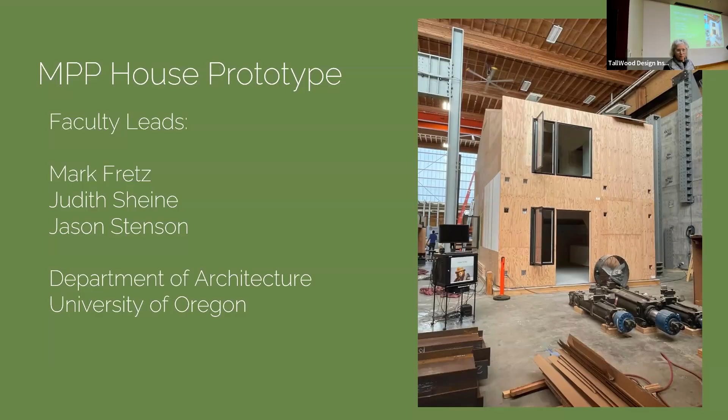So this is a project that we have been working on for way too long, really starting in 2018 and then really starting on it in 2020. We were actually working with very small grants from the sub-awards from Wood Innovation Grants for a while. And when the EDA BBRC project came along, that project provided funding to actually do full-size prototyping, which is when we actually began to make progress on the project.

So there's more history and background to this, which I won't go through, but basically we developed a 2-story, 2-bedroom, very compact house type, which is meant for cottage clusters and ADUs in response to Oregon legislation, which essentially got rid of single-family zoning in any community over population 10,000, and we're trying to develop some very efficient models. So why mass timber and which mass timber?

As I think I said when asked about funding and policy, the idea of using more mass timber in houses is to create more of a market for mass timber, to create more mass timber manufacturing plants in rural communities, and to create more of a market for small diameter, selectively harvested logs to reduce wildfire risk. So there are a lot of reasons to do it that have to do with the economy in general: wildfire risk, rural jobs, rural economic development.

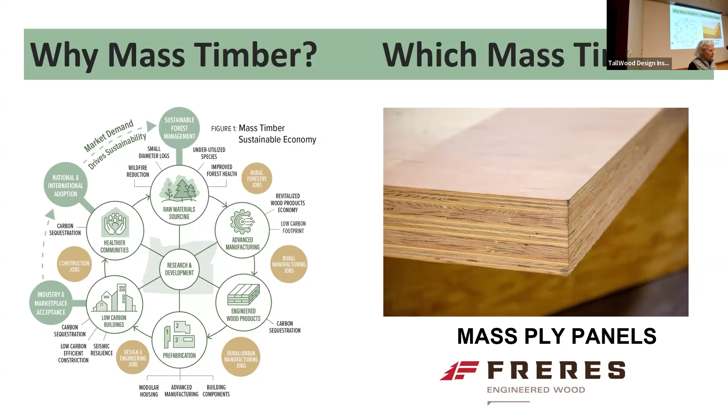So instead of working with CLT, mass plywood was developed and certified in 2018, which is when we started working on this. And we discovered we could work with really thin panels, 3-inch and 2-inch panels, which saved a ton of fiber. So we began working with Freres mass plywood panels on this project, and we've been working on it for like 5 years. Way too long, right? Took much more time than it should have. And we developed plans for a 2-story, 2-bedroom house.

And the idea was to make it flat packed. We originally had thought about volumetric, but some very smart people in the construction industry who we consulted with were like, if you're going to do small infill sites, you should do flat pack, right? So you can actually take all the parts in a truck and put it up on site. And modular is probably good for slightly larger installations, or if you're doing an entire house. So that's what we embarked on.

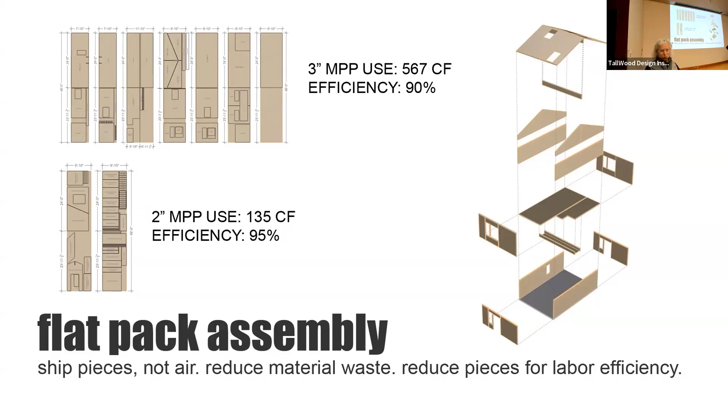And our first idea, as you can see here, was that we were basically going to do platform framing, where we did mostly horizontal panels. What this meant was that we worked closely with an engineering team, Mikhail Gershfeld, who was here from Cal Poly Pomona, and Ficcadenti, Waggoner, and Castle, an engineering firm that actually did the calculations and drawings, and of course are Mikhail's former students from Cal Poly Pomona, where I used to teach with Mikhail.

So the original idea was that we thought we were going to ship these panels with insulation and cladding already on them, and this led us to a huge number of custom steel connectors on the interior, as well as a lot of interesting kinds of miter joints. Well, the issue with that was that it involved a huge amount of hand labor and drilling in self-tapping screws.

And we did not ask a contractor to do the first one. We actually wound up building it ourselves. And by ourselves, I mean the entire team except for me. I did a little sanding. That was about it. So we developed these interesting seismic connections, where the engineers did that.

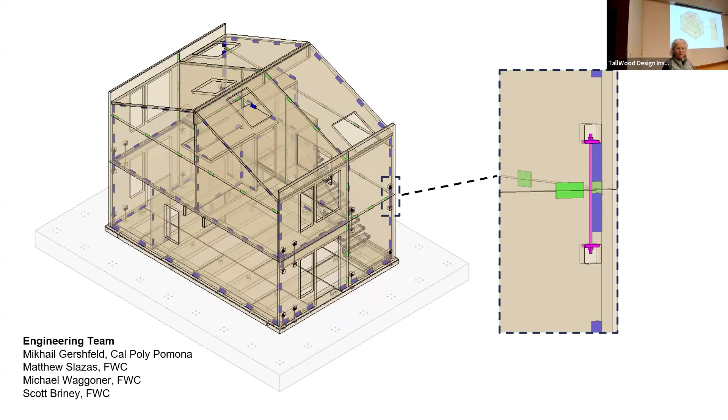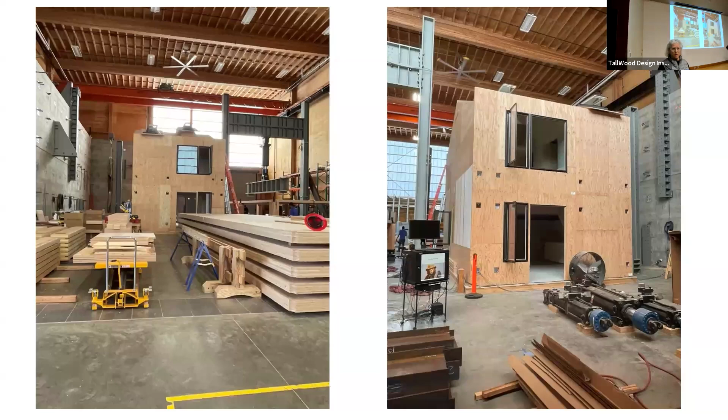So everybody who was here last year got to tour this. If you come back next year, you'll tour the second one. And we had an open house because members of the Oregon Mass Timber Coalition, who do a lot of communication, decided we should furnish the house and treat it as if we were real estate agents, and then people tramp through. We had a giant open house where we had about 120 people come through in an afternoon. And as you can see, we went through the IKEA catalog and ordered furniture for dining and for the living room, and we put in a kitchen, et cetera.

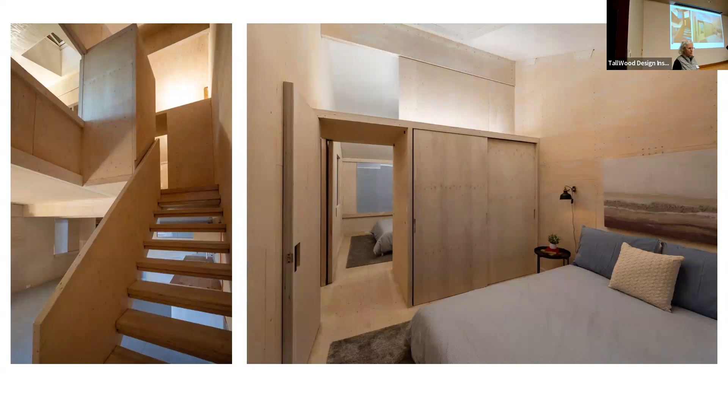And we did an extremely non-scientific survey of people as they were going through it. It was like, how would you like living in a plywood house? And again, because these people were Oregonians, they're generally very happy about wood. Few people did ask if they could put up wallpaper. It was like, you could, right? Yeah, painted plywood does not look good at all. But you could put up wallpaper.

We did actually do a kind of very light whitewash. I actually did another thing, I got to pick the color, which was a white with some yellow in it and a very high degree of reflectance. And we put it in about a 300% solution into Timber Pro so that we could apply it in one coat. Because as one of my colleagues likes to say, the wood tans over time. So we wanted to stop it from doing that and lighten it up as much as possible. So this is the upstairs, again, fully furnished as 2 bedrooms. And I think I have a slide of the bathrooms, which also went in.

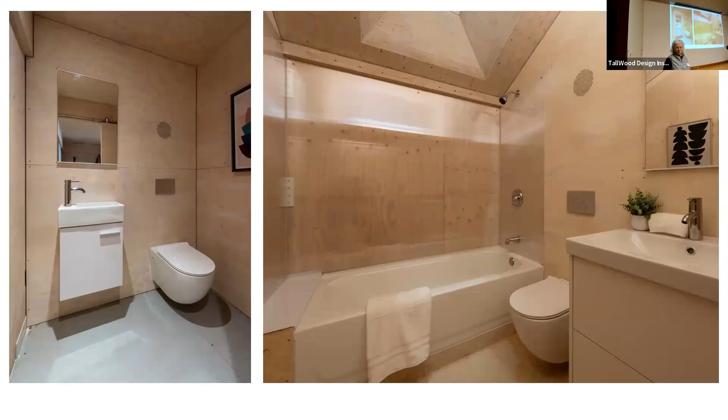So there's an enormous amount of enthusiasm and interest in this, but the biggest question is how much does it cost? And the answer is we don't know. But we are going to be finding out very soon because we are embarking on a second prototype. So the second one, we're actually giving up this concept that we're shipping the panels with insulation and cladding. We assume that we are just going to ship the panels already pre-cut in essentially a kit of parts that will come with the panels and with the steel connectors.

And because we're not shipping with the insulation and cladding, we can do all the steel connections with just standard connections. So I know there's some people here from Simpson and Rothoblaas, right? So just standard connections and not any custom ones. And we're going to be doing vertical panels, which means we don't have to do structural connections between panel to panel, which saves a lot of hand labor. And in the end, we're also using one panel less than we did in the horizontal version, which is something.

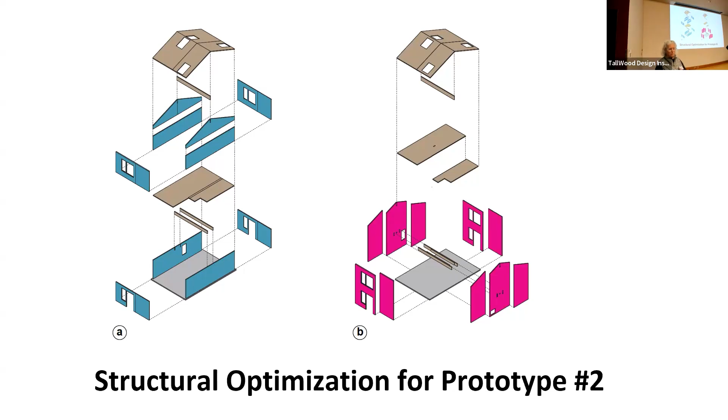And we're also taking out most of the steel and almost all of the custom steel. So we think we've cut about 15,000 out of the project. But again, we're not quite sure what it cost yet because we did the fabrication in the lab. We did the construction ourselves.

So we would be several months ahead if, and I'm going to complain for a minute here, UO contracts weren't a little slow. We should have had an RFP issued more than 2 months ago. It finally went out. We're about to make an award. We're really going to be starting the second prototype very, very soon.

And this one is going to be going up outside Emmerson in the yard. It will have insulation and cladding on it. And it'll go up for a year because, and I'm going to interrupt myself for a minute here. So this is just a drawing of the panels. And you can see from the diagram that we will not have to do structural connections between panels because they're all going to be vertical.

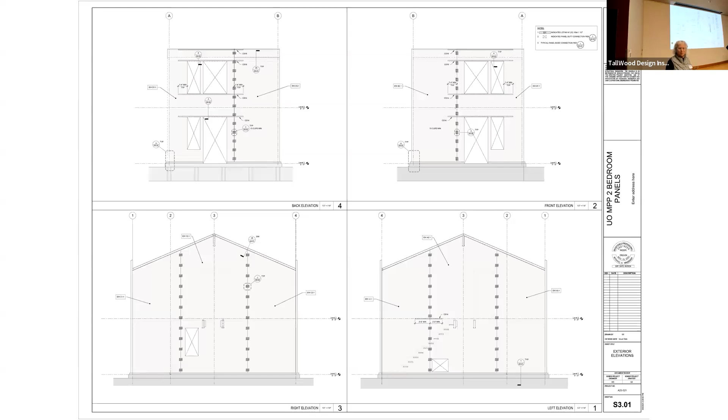I mean, we have to do side to side, but not ones that involve miter joints, which is a huge saving of labor. And we are using fewer panels on top of it. You'd have to compare it to the other one, but we're using one 3-inch panel less. We're using 3-inch panels for the exterior and for the floor, and all the interior panels are just 2-inch panels.

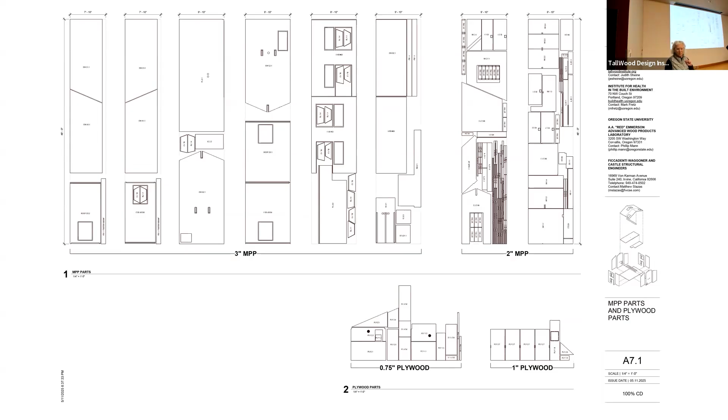So this is the complicated nesting we have for cutting up the panels. And again, we're going to find out how much that fabrication costs. And this time we are putting in plumbing. We are not running water through that plumbing. We are putting in electrical, which we did last time. We'll be hooking it up electrically. And this is what it's going to look like.

We actually designed a porch and we have a vent stack and some other things that are going to go in it. But it's going to go up for a year because we're going to be testing lots of things, as Mark said. We're going to be testing air infiltration, thermal, daylighting, acoustics. What else am I forgetting, Mark, that you're testing? I'm not doing that testing. Vibration, moisture. Yeah. And by keeping it up for an entire year, we're going to be testing it under various circumstances.

So when you come back next year, we're actually going to be able to tour you through it again, but we are going to furnish it and have open houses and get people's reaction to it. We know architects love plywood. The question is, does everybody love plywood? That relates to Dylan's question about, have you tested this in other parts of the country? Here, everybody loves wood, right? So there's much more enthusiasm about it.

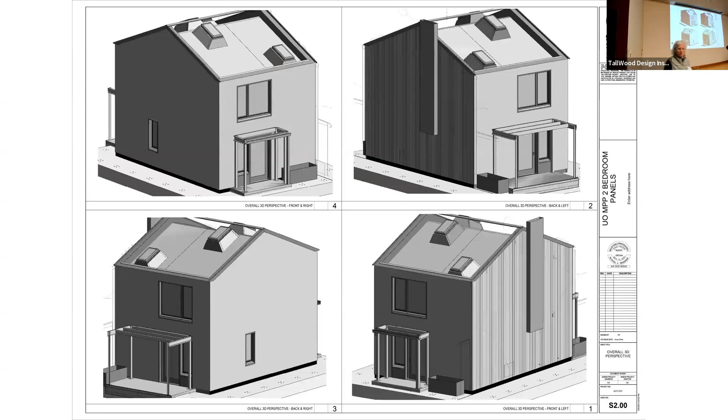And I'm just going to say 2 words about another project. The prototyping project with the EDA was for the house, but also for an energy and seismic facade retrofit project, which has a lot of similarities to this one. We did a 1-story mock-up with a wood innovation grant quite some time ago, but due to a number of delays, which we will not go into, this one we just put out an RFP for, so that also should be happening pretty quickly. We're going to be doing a 3-story mock-up of this inside the Emmerson lab.

The idea of this is that there'll be pre-assembled panels, this time with insulation and cladding, that are for retrofitting 2- and 3-story multifamily residential units all up and down the West Coast that are desperately in need of both seismic and energy retrofit. Mark looks a little puzzled, but we are doing that, right?

So that one, we're going to be doing that. That one will be going up in the next few months. I think that we actually are not going to have space on the floor until December. And we did very sadly have to disassemble the first prototype, because as you will see when you go to Emmerson, there's a huge amount of demand for space on the strong floor. So we had to take it down, but this one we're going to put up outside on the strong pad that's out there. And again, we're very excited to invite you to come see it once we have it up.